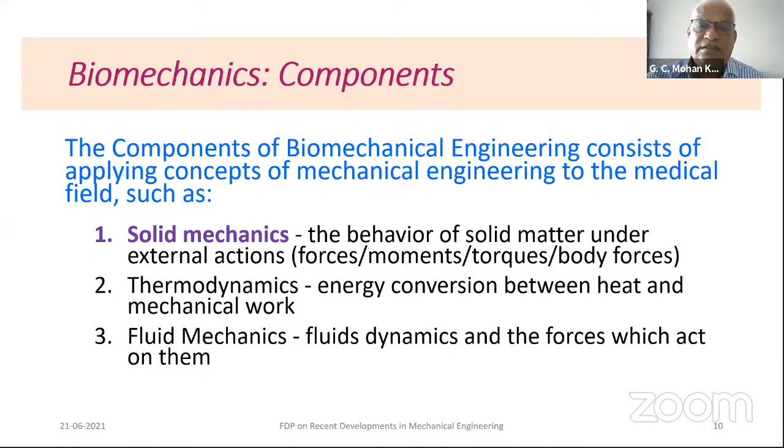Again, fluid mechanics is going to be one of the important features in biomechanics, dealing with fluid dynamics and the forces which act on them. In particular the circulation of blood, alternatives to the heart, the response of tissues to varying blood pressure, a lot of things are involved in it, and also inhaling, air, oxygen and the activity of the lungs; all that has been discussed with fluid mechanics. So it is not surprising.

One of the best examples we quote for applied mechanics in biomedical engineering comes with this figure. Oscar is a runner; he participated in the 2011 World Championships in Athletics in South Korea. He used prosthetic leg blades. Usually amputees use a kind of prosthetic, like I hope you might have heard of the Jaipur leg, fitted so that they can walk.

We have seen those people simply walk without doing exercise or such things. But to run successfully in a competition, blades have been created in such a way that they tackle all the dynamics of the body. So it is a wonderful example that we quote for biomechanics.

The role of this blade is very interesting. This blade has to mimic the action of the anatomical foot or the ankle joint. However the other leg behaves, the blade has to behave the same way. The blade has to store the energy from the body weight and then release it as the runner pushes off. It has to create some additional energy to start with. So it has to do all the activities of the muscles.

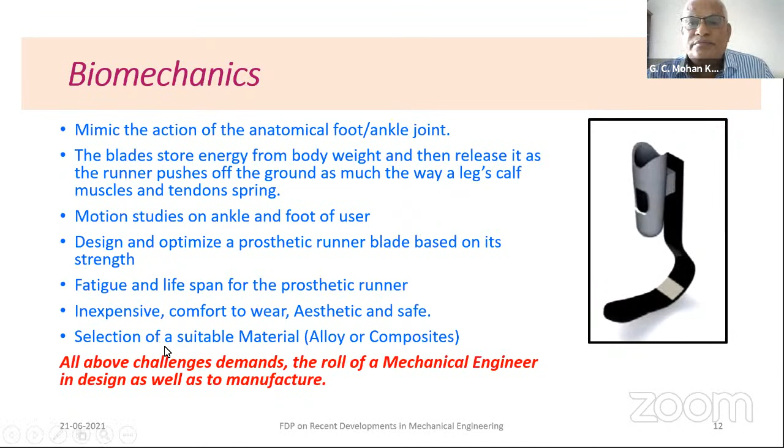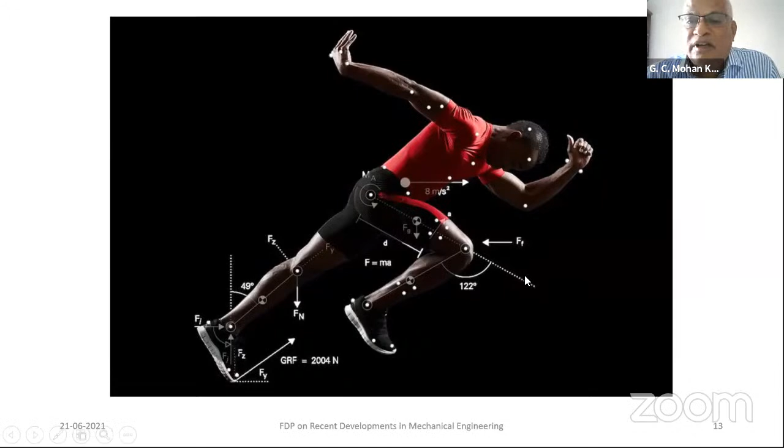A lot of things are involved in gait analysis: the relative movement of limbs, the body weight, that energy, where it is being released to the muscles, how they react, the reaction of the ground for the participants in pushing, to optimize the processes, how the force will act on each limb, what the reactions are, and how to make the best use of it. So it needs a lot of the engineering that is involved in biomechanics.

Applications of mechanical engineering, in particular to gait analysis, are increasing day by day. Take an example of a pair of shoes. Lots of shoes are available for orthopedic concerns, for sport, for others. Nowadays, sport shoes are totally different from what we generally use. The shoes are particularly designed for a particular sportsperson to best fit and to support the activities.

Therefore, gait analysis studies the complete human body activity, and all the requirements will be based on the entire body structure. So it is referred to as gait analysis. There are two aspects in general. One is clinical support, and another is scientific support. In general, we call them the clinical front and the technical front.

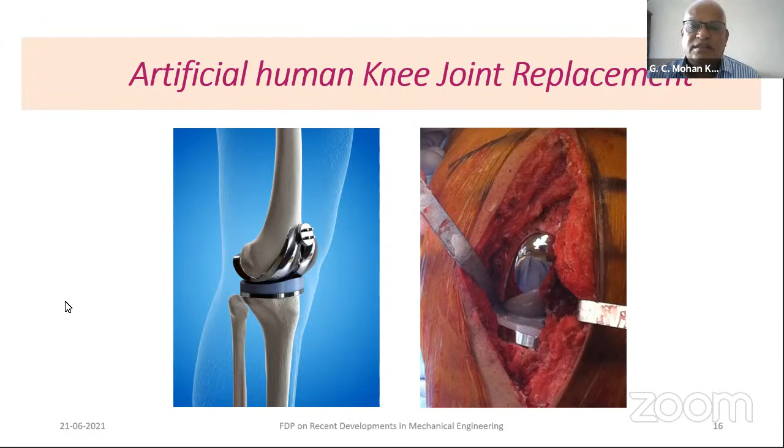Particularly to tackle the knee joints, the entire joint has been replaced. On the left side, you see what the joint looks like, while on the right side you see how it has been placed inside the body. Nowadays, knee joint replacement may be partial or a total joint replacement. Total joint replacement has become popular compared to partial. Here they cut some portion of the diseased bone, and then they fix the implant so that it can be used really comfortably. We will discuss this in detail in the coming slides.

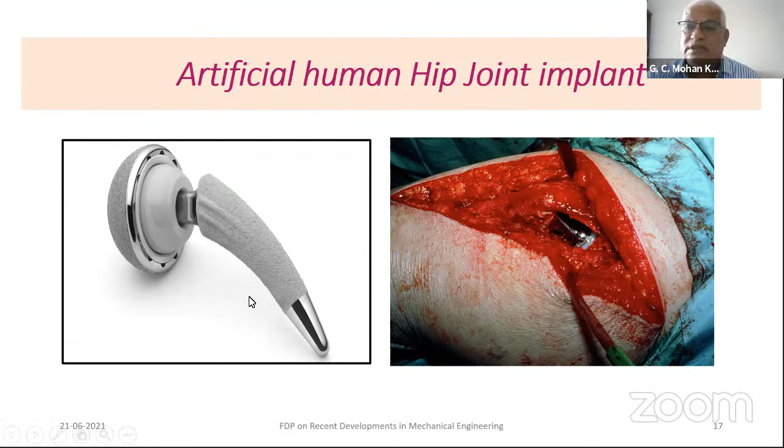In the artificial human hip joint, on the left side, you will see the implant that has been fixed into the body. It has been practiced over many years, not only the hip joint, but entire hip joints that have been replaced successfully with artificial implants and prosthetics. It has been done well.

So the development of the material, the stent's use in its life, and how to insert it, the entire process has been developed by the engineers successfully. One of the successful events in the medical field is the use of the cardiac stent.

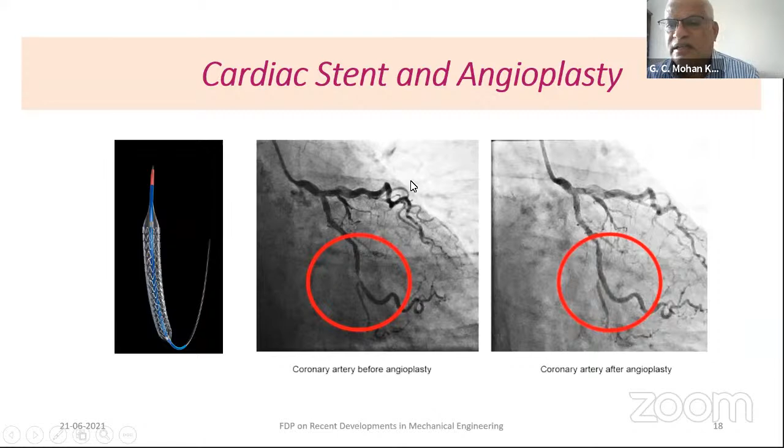So we feel that the design of such things is case to case. It means it changes from patient to patient: the structure of the leg, the size of the leg, their comfort, the requirements and the needs. Therefore, design of the prosthetic or the shoes is going to be a part of mechanical engineering.

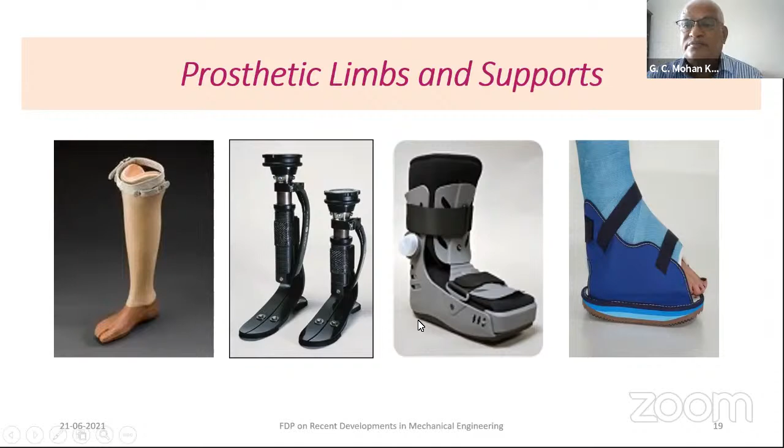It is not only related to biomedical, but also safety devices, like the design of helmets. If it is readily available, we won't feel that, but a lot of people will insist on going for a good helmet. They have to consider it should be light, comfortable, and safe enough to protect the head. A lot of technique and informative data has been involved in designing the helmet.

Also the industrial helmets, the chest guard, even the industrial glasses that have been used. A lot of activities are involved, not only in designing, but also in manufacturing.

Nowadays, the trend is to fix the dental part permanently into the mouth. They put the screws all along, four, and the denture has been fixed onto this permanently. No need of removal of the frame or any kind of discomfort to the patient. That is going to be a part of it, and it is going to be very, very interesting.

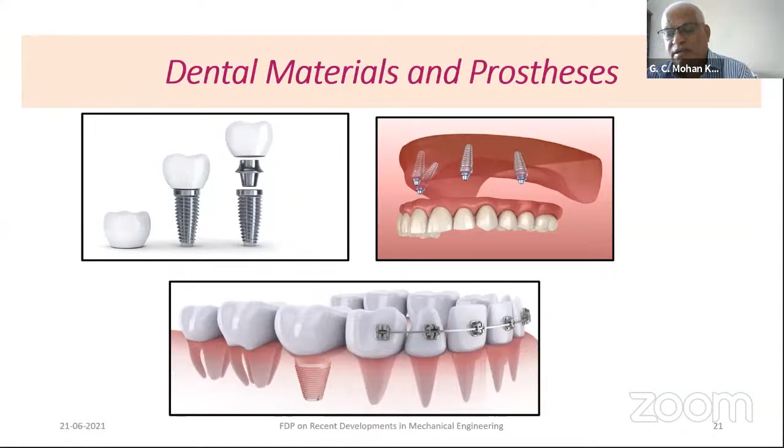The reason is all blood vessels and nerves come from the body, the jaws, into this tooth through this root. Therefore, while applying that force, you have to see that the movement of the teeth should not disturb the root of the tooth. So that is going to be so important. So it has been designed. A lot of forces have been applied to the dental wires with various mechanics.

Here it is, a lot of things are involved. If you look at the various arrangements, usually we have not seen this because it is put inside the mouth. We want to see what are the elements used to create a force on the teeth, so only the front part of it is visible here.

If you look inside the mouth, there's a small spring used to uplift and give sufficient force so that the tooth comes up using the spring. Also, you will see a wire fixed and plugged into a key, and by rotating that wire, a lot of force is generated which will draw or pull the set of teeth back. That's what I have seen.

This is going to be a different technique. Here what they do is give different rotations and a hook. Whatever extension occurs will pull it up. Also, a lot of arrangements have been made through the spring to pull the teeth set back through the arch wires, as you will see.

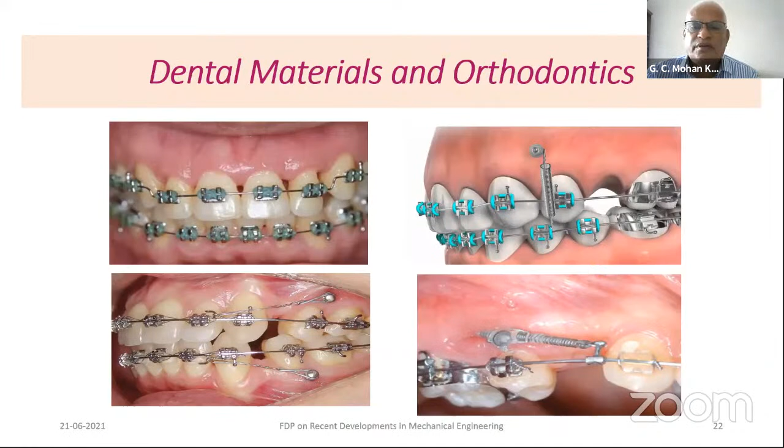A lot of arrangements and devices have been developed in the case of dentistry. There are a lot of mechanical devices available to correct the arch of the dentistry.

If you look at this arrangement, it is going to be very interesting. Looking at the outer structure, the length or distance between the two is going to be very, very small. Usually we call this the upper jaw or the maxillary portion in dentistry. To correct the tooth position, it is only possible to enlarge the palate gradually over time.

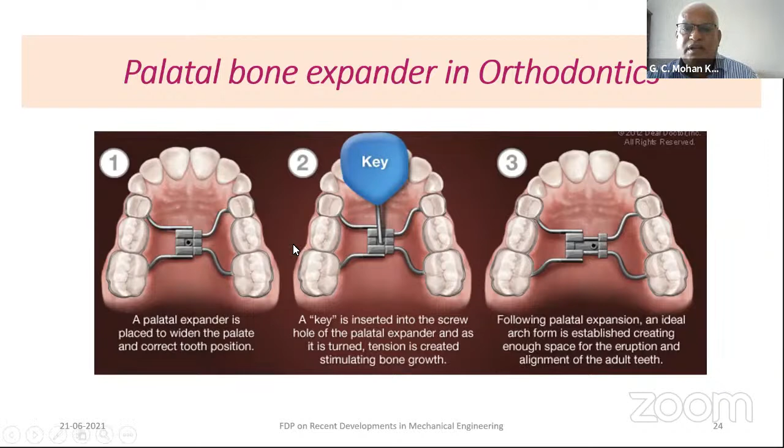The bones and structures—it is going to be interesting.

Let us go through some details about bones and structures. Bones are living tissues, we all know well, with blood vessels that carry out a lot of major activities in the body. Particularly in the case of dynamics, the role of bones is going to be very prominent and important.

The structure enables them to grow. They transform and repair themselves throughout life. Once part of a bone is worn out, you will see that it heals up and repairs itself, an automatic process that happens throughout life.

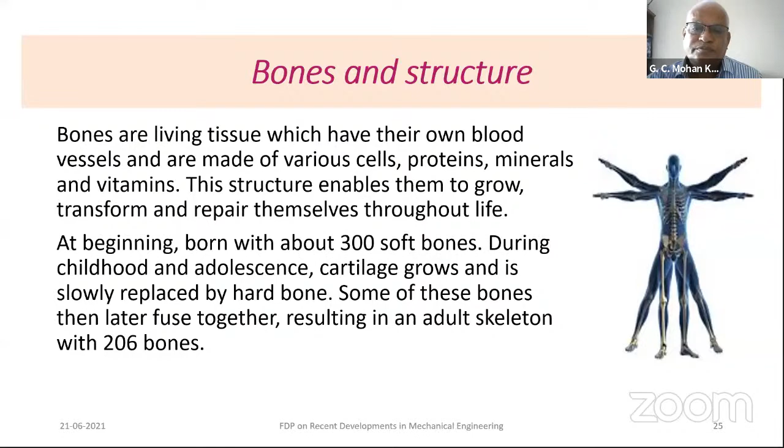There are two types of bone tissue. The first is compact bone, also known as cortical bone. If you look at the outer part of a bone, it has sufficient thickness, though most of the time cortical bone has a relatively small thickness. It is very hard and dense, and usually takes a lot of load.

The cancellous bone, or spongy bone, or trabecular bone, is the inner layer network. It is lighter and less dense than cortical bone. Where blood vessels or nerves pass through, it provides space to fill with fluid that helps a lot. This will be discussed in different chapters.

Cortical bone is very strong, and its structure has been shown here in a microscopic view. The spongy bone has much less strength compared to compact cortical bone.

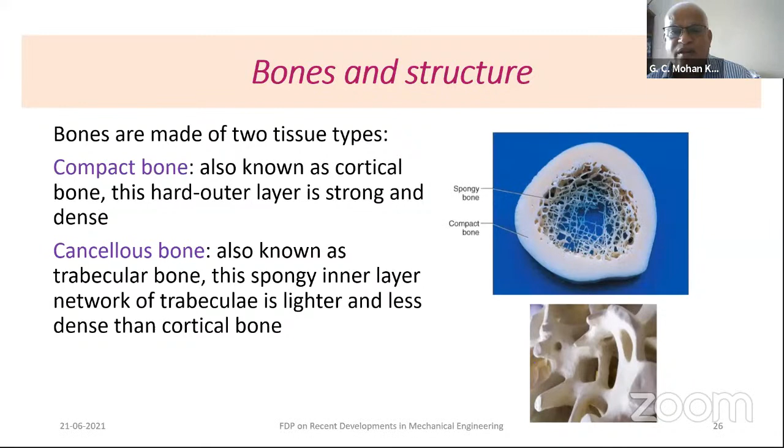Going to the inner part, it is soft, and the middle is a little hollow. Root canal treatment is inserted into the tooth through this soft part. Therefore, every tooth has a spongy, very soft tissue at its middle, which supports a lot of nerves and blood vessels in the teeth. So it is quite natural.

Now there are two types of bone structures. One is the woven bone, characterized by the haphazard organization of collagen fibers and mechanically weak. The lamellar bone is characterized by a regular parallel alignment of the collagen into sheets, as shown here, and is mechanically strong.

Most bones, long bones, whether the thigh or the leg or the hand or whatever structures we have seen, they are lamellar bone. They are very strong.

What are woven bones? Woven bones grow very fast, in areas not exposed to much load or stress. This type of woven bone can be seen when a fracture occurs.

Any bone that fractures is separated by a distance. In the beginning, bone grows in between the two fractured surfaces, and that bone grows in the absence of any day-to-day activity forces on it. Therefore, a soft bone grows between the two fractured bones, it is very soft and not ordered. When it is being exposed to stress, the fibers arrange themselves and it becomes part of the bone.

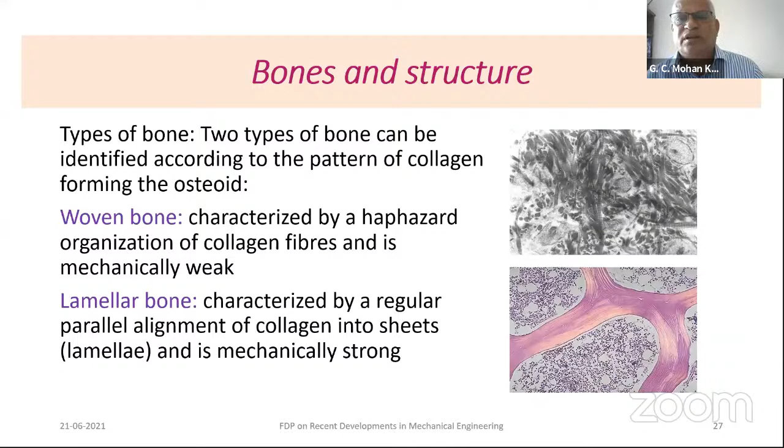As a mechanical part of this, we usually talk about the Young's modulus and strength of bone and other materials, to understand and compare their strengths.

Ultimate strength of the bone reveals how much load it can bear. Strength is a capacity of the bone, and for cortical bone you will see that compression strength is higher than tension. This is because most bones are always subjected to compression, and very rarely are bones subjected to tension.

Some part of this we see in dental contexts, when forces act like a beam. Some part of the beam will be either below or above, depending on the location of the force, and will be subjected to tension. So if you look at the values, compression is more than tension, and compared to shear, it is going to be very small.

So whatever values are given, it is for a dry bone. Generally dry bone values are set and accepted to be very close to living bone, since it is difficult to conduct experiments on living bone. Therefore experiments on dry bones are more valid and agreeable.

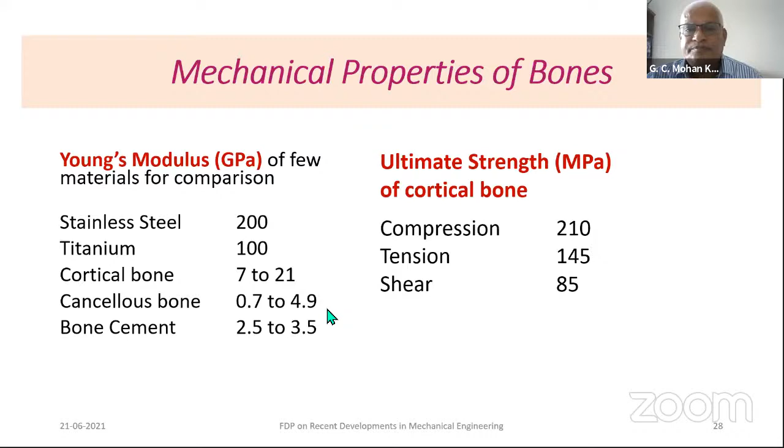So when the bones have healed up, it is necessary to take out such wires or implants from the body. Usually medical practitioners will decide when it has to be taken out. So to understand the behavior of bones, usually we do a tensile test. It is more appropriate to understand the strength of it.

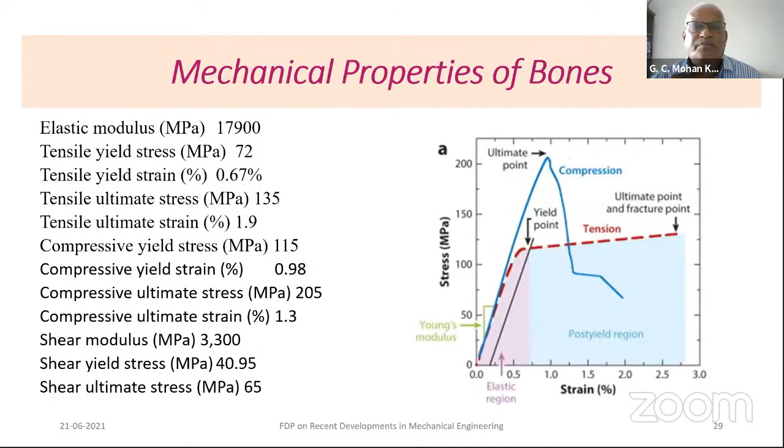So I'm giving a lot of information about when the load has been applied along the axis, or the transverse direction perpendicular to this, or even the shear, because while modeling with the finite element, you may need a lot of data, the directional stress data that has been recorded. It is going to be very helpful in the finite element analysis.

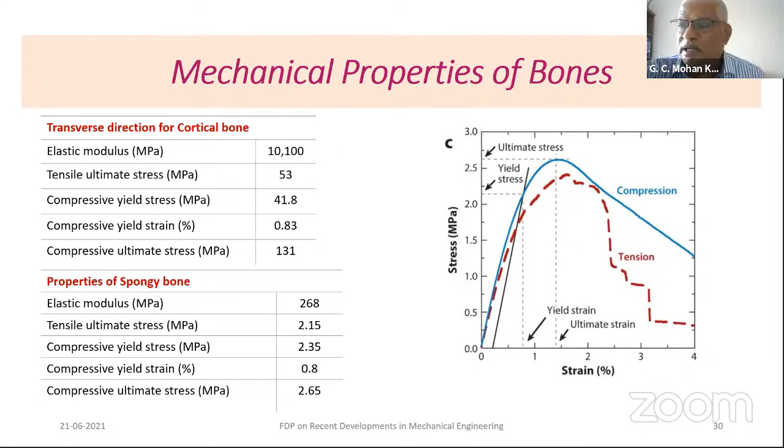Various types of joints have been seen in our body. There are three types of joints that we usually classify. One is immovable or fixed joints, fibrous joints, found in the cranium. In the cranium, meaning in the head, there are a lot of sutures, but they will not move. It is a joint, we call it sutures, right? So they will not move.

In the case of the pelvis and the backbone, it has been fixed, but it will not move. The pelvis and the backbone have been fixed via fibrous material, but there will not be any movement. So it is totally a kind of bone.

And the slightly movable joint. It means very, very small movement, so that the rotation is not more than around 12 degrees on either side. Vertebrae, or the backbone, will not rotate fully. Only part of them will rotate. And there are freely movable joints. They are called synovial, in the presence of synovial liquids. When the movement is sometimes more than 40 to 60 degrees, it is referred to as a movable joint.

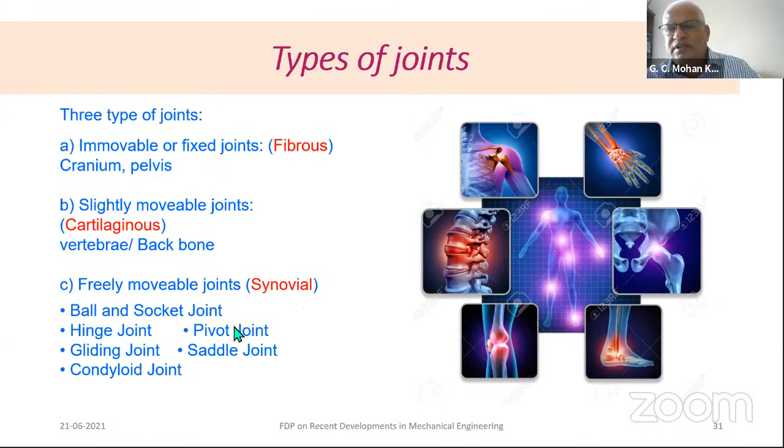And freely movable synovial joints refer to the knee joint or the ankle joint, right? And the hip joint, these all come under this type of joint. How are the joints made? There are three types of connective tissues used within the joint for a successful, constrained joint.

Cartilages are very common. They form a kind of cushion between the bones in order to stop them rubbing. Usually cartilage looks like a white spongy thing at the end of the bone. So this is one bone, right, in the upper part. And here you will see that thick layer, a soft material, referred to as the cartilage. And another similar cartilage for the other bone is fixed here. Cartilages are found at the ends of bone. They give you a kind of cushion when they come in contact.

Okay, that's fine. The ligaments are very strong strings that hold the bones together. The upper bone and the lower bone, you will see the ligaments crossed like this. They connect from here to here in the middle. If you look at the cross section, ligaments are like threads or strings that hold the joint. So usually a lot of force is taken by these strings to keep the joint intact. Even when you apply a moment, it rotates and deforms, and the ligaments expand and hold the joint intact.

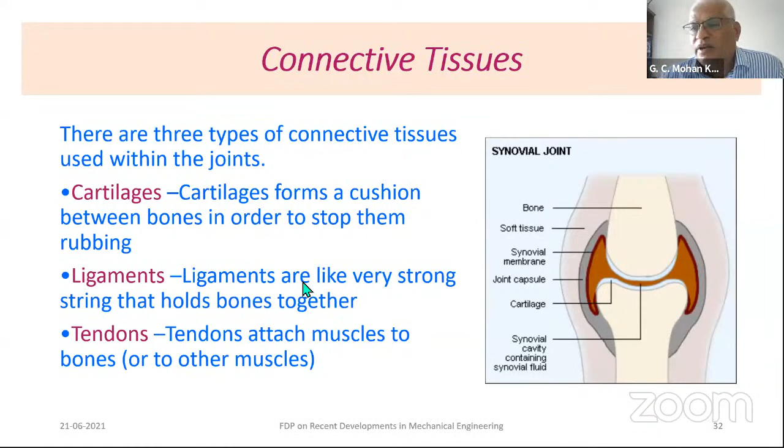In our study, we have done a lot of work on development of cartilage tissues. A couple of my research scholars have successfully developed a material that can replace the damaged living cartilage with a new fresh composite. Recently, two research works have been going on and have been published. I will take a few slides from this.

The first paper has been published in Nature Scientific Reports, that is, nano hydroxyapatite reinforced chitosan composite hydrogels with tunable mechanical and biological properties for cartilage regeneration. And similar basic work has been published in Materials Research Express and also in the conference proceedings of the American Institute of Physics.

He was the first research scholar working on some of the biomaterial tissues or ceramics that can be used for joint purposes. Now, in this paper, if you look at the title, the composite has tunable mechanical and biological properties. It means the mechanical properties of the composite will vary according to the requirement instantaneously. More interestingly, the values of the mechanical properties can be changed, and the biological properties also change accordingly. It matches well with cartilage regeneration.

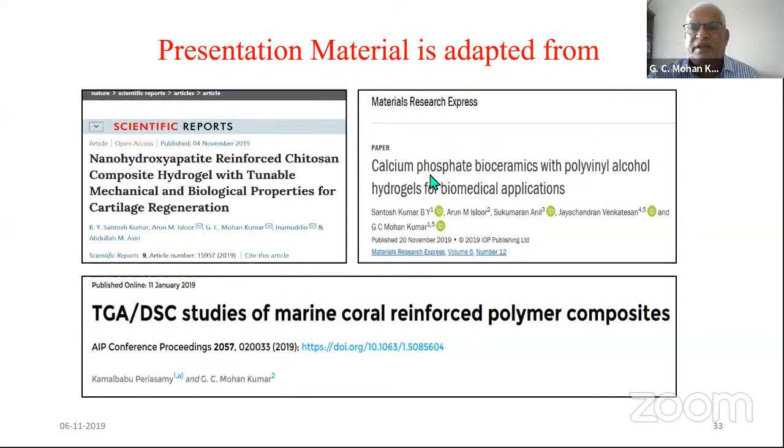And what is also very interesting is the regeneration: when the composite fails into a number of pieces, it will reunite itself. It means the composite will grow itself to reunite and it works continuously. So that's the kind of work that has been taken up. I will take a few slides on how the things have been done.

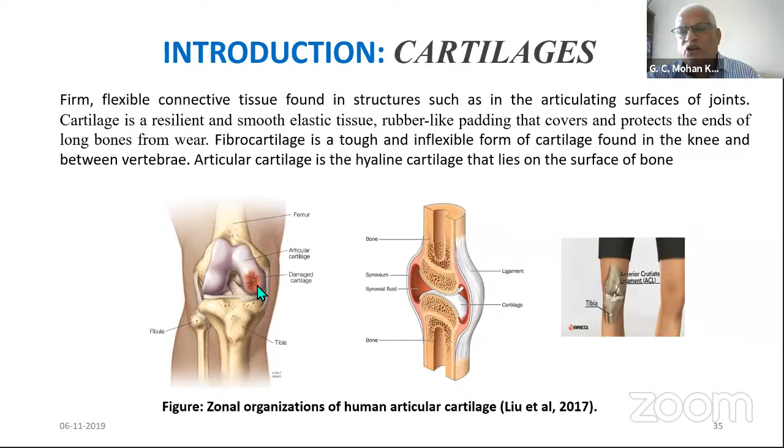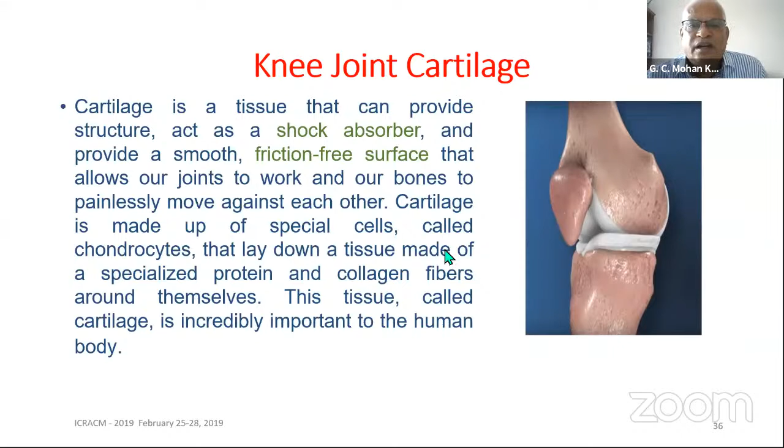This picture will give you a clear picture of how the cartilage looks in the joint. It works like a shock absorber, and it is also a friction-free surface, supported by synovial fluid in between the two parts.

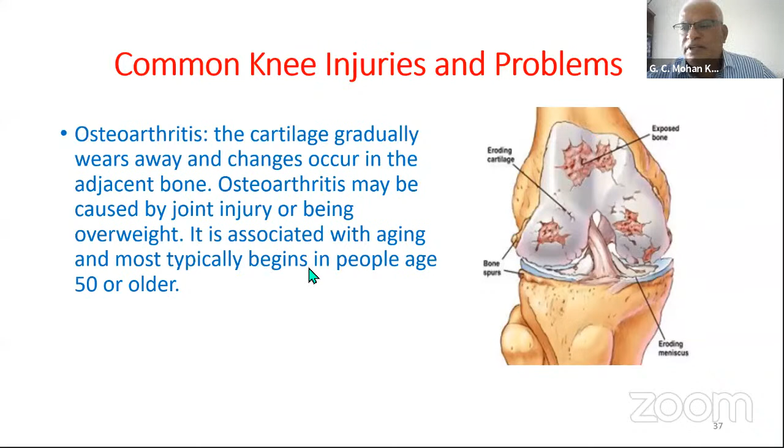So there could be damage on the cartilages. It may be because of the injury or osteoarthritis. A lot of issues will cause it, but this type of disease is going to be very common for people of 50 years or above. There are a lot of treatments also available.

The rough cartilage will be trimmed and ground so that it softens. Or sometimes what they do is insert what you call pins inside of that. They put small holes and it will refill. People do that also. So that is going to be the structure, how the surface looks, and it will show that.

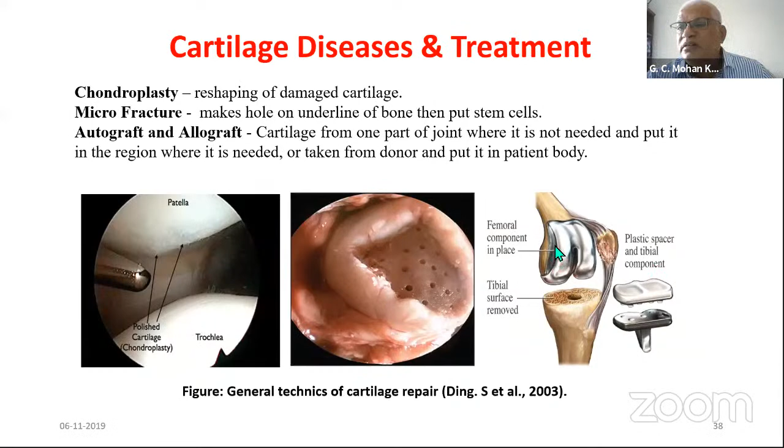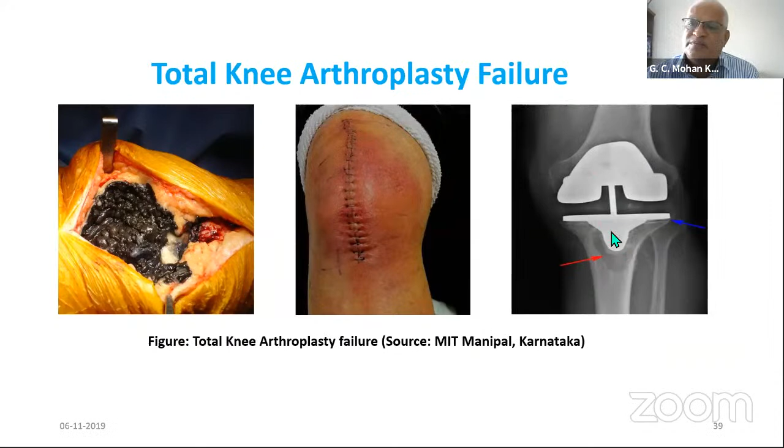Suppose you want to replace the cartilage, what will be the alternative in that case? That is discussed later. So when the surgery fails, you will see how it happens. The entire joint will become reddish and swollen once it has been opened. It looks like this, so this is the artificial knee joint that has been put in. That will be the picture of this.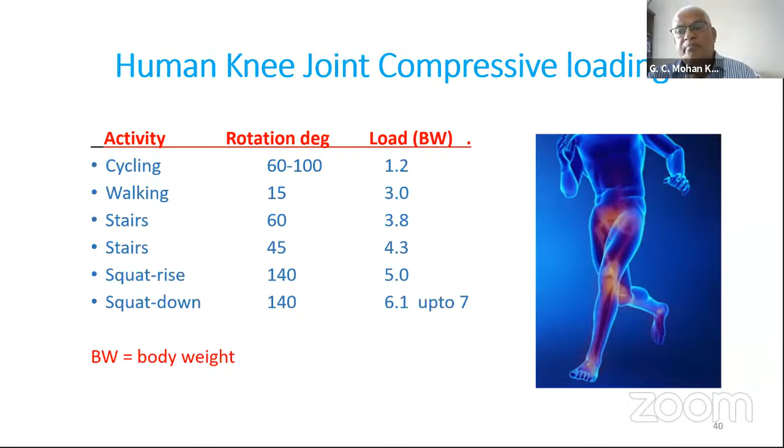It's also interesting to see that while walking, when one leg leaves the ground, the entire body stands on one leg, right? The whole body weight comes through the joint, and the body weight acts at the CG, so there will also be bending. Therefore, not only a compressive load, but also a heavy bending load comes to the joint.

What are the substitute materials for the cartilage? In one of the theses, submitted by Kamal Babu, a lot of work was done on cartilage materials, and he developed polyvinyl alcohol hydrogels, a promising material reinforced with a bioceramic, hydroxyapatite. This ceramic was developed by processing cuttlefish bone. This material was used in the PVA hydrogel to prepare composites, and a lot of experiments reveal that it is going to be more useful.

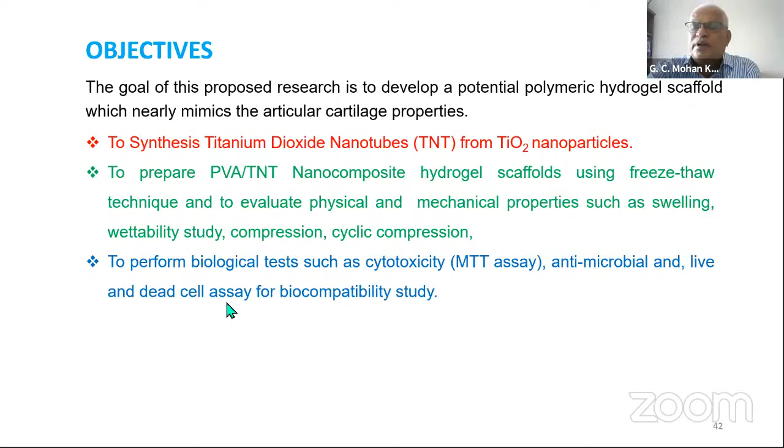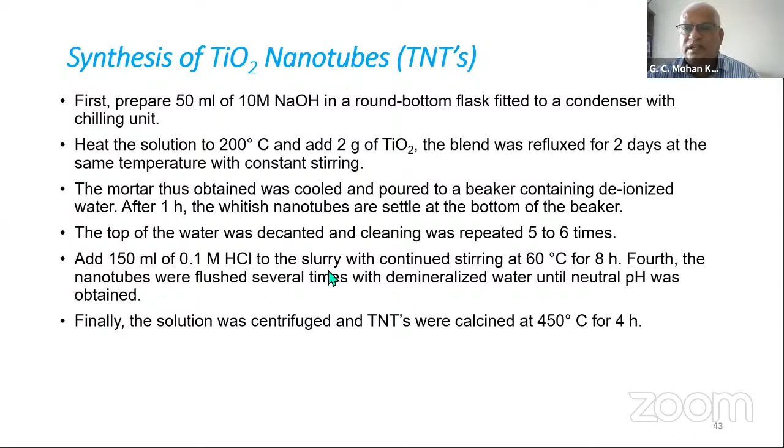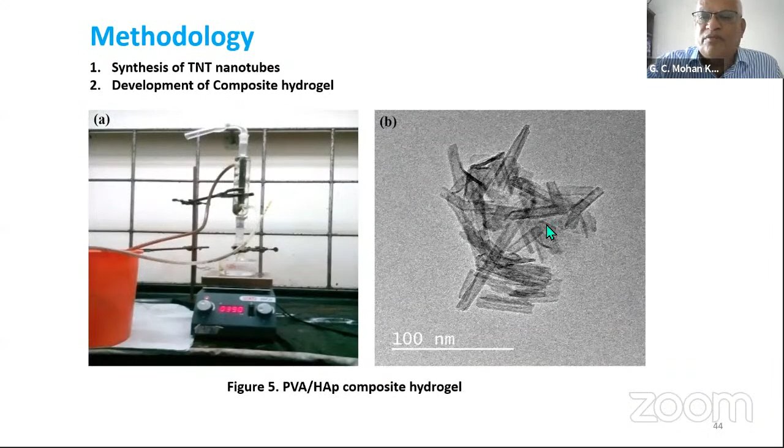The objective of that work is to synthesize TNTs from titanium oxide nanoparticles. A lot of additives have been added to prepare the composite. In brief, these are all the articles published in Nature journals; you can go through them. How to synthesize titanium oxide nanotubes for developing composites can be seen here, with the different structures addressed, and how nano-reinforced materials have been developed.

Now, this is a piece of that hydrogel. It looks very transparent, and when you hold it in your fingers and press it, you will see that it compresses to a great extent. It won't rupture, it won't break. Even a 10 mm thick cylinder can be compressed to 1 millimeter or even less. So it is such a spongy material. If you look at the structure on the right side, you see how the different combinations of reinforcement and hydroxyapatite behave.

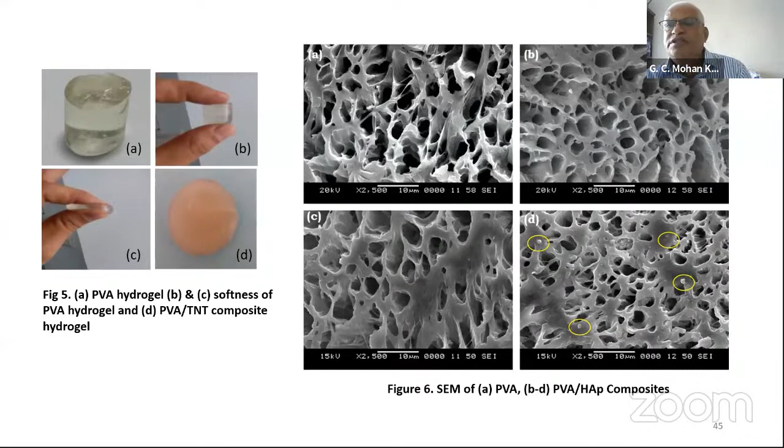And if you look at the formation of the material, how spongy it is, that has been captured in these pictures. Okay, it is cartilage. I will not go into the detail. A lot of polymers are available for the reinforcement, and among these we have taken up this hydrogel and the PVA, and for the reinforcement hydroxyapatite has been taken, which is referred to as a bioceramic.

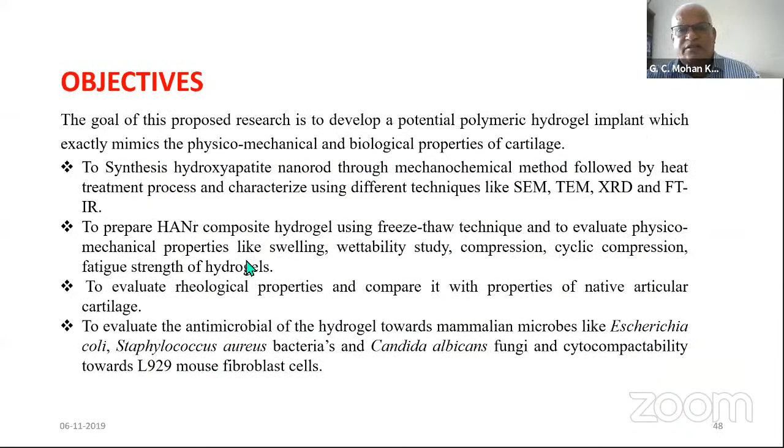So the objective of the project is to develop a material which can be used as a substitute for the cartilage material. So you will see how that material looks. The hydroxyapatite reinforcement has been derived from fish bone; it has been crushed and calcinated at 800 degrees centigrade for more than 6 hours, and the material that has been processed chemically has been used as a reinforcement.

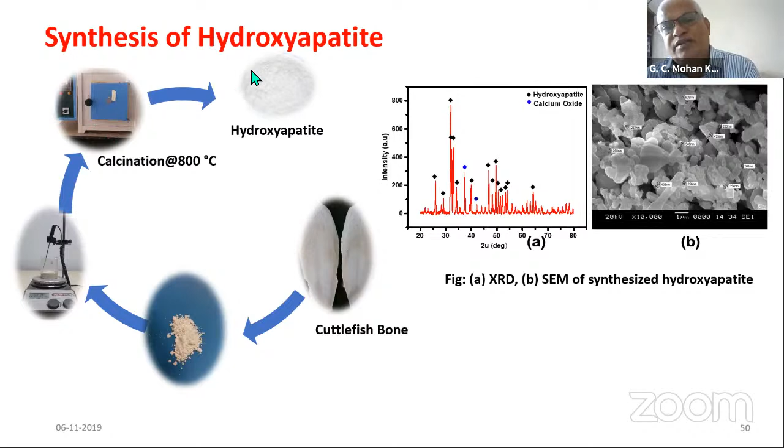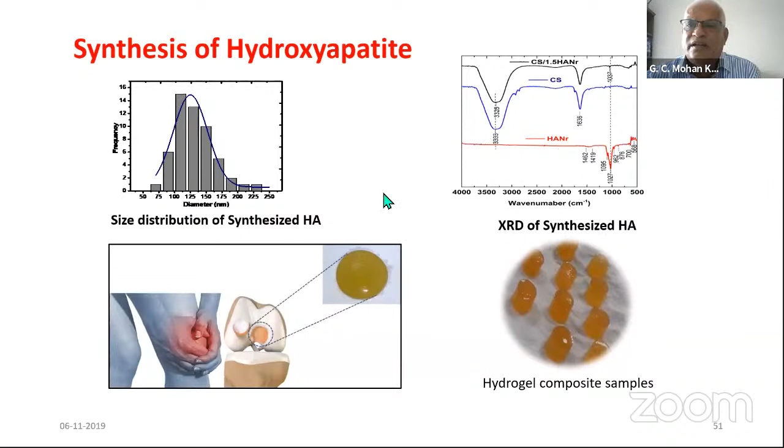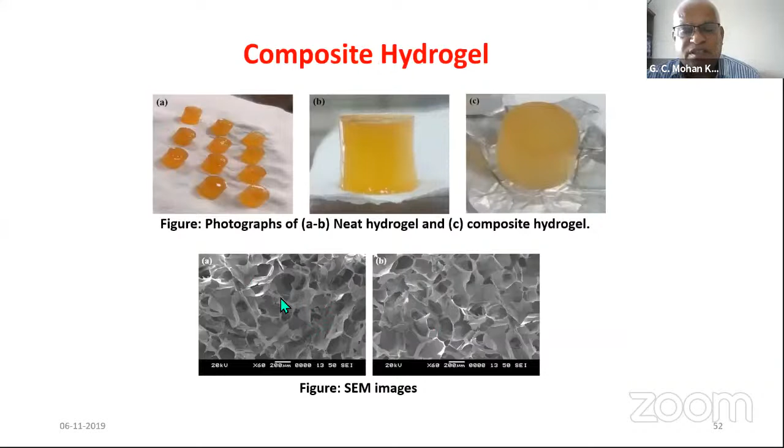You will see that a lot of hypotheses have been tested with the technical support of XRDs, TEMs, all done systematically. Among all the materials developed, this is the best composite hydrogel, with better structures compared to the previous one.

Okay, what is the swelling and the wettability of the composite? Because cartilages are particularly made to absorb liquid from the surroundings, the swelling ratio, how much it absorbs, should be more than 400%. It means if you take 100 milligrams, it has to take 4 times of that liquid. It has to absorb so much liquid.

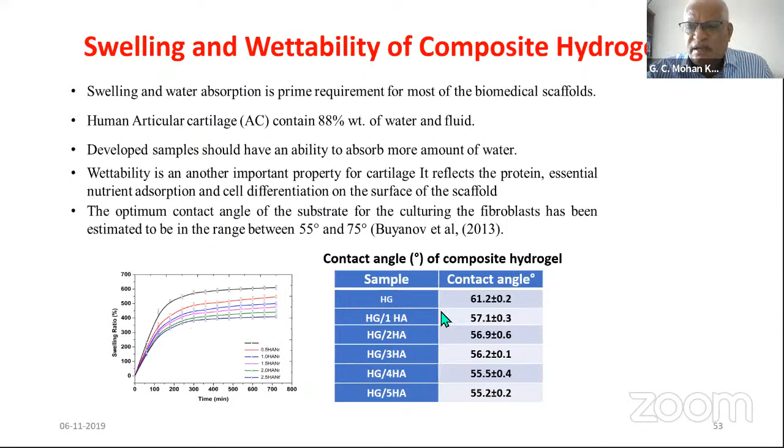So these experiments reveal that the HAP with the higher percentage will absorb a higher percentage; it can even reach up to 6 times, that is 600% water that it can absorb. So these are the different properties. From the mechanical engineering point of view, how this hydrogel behaves with different proportions of reinforcement is taken here to determine the strength. Here the maximum strength is around 1.2 megapascal.

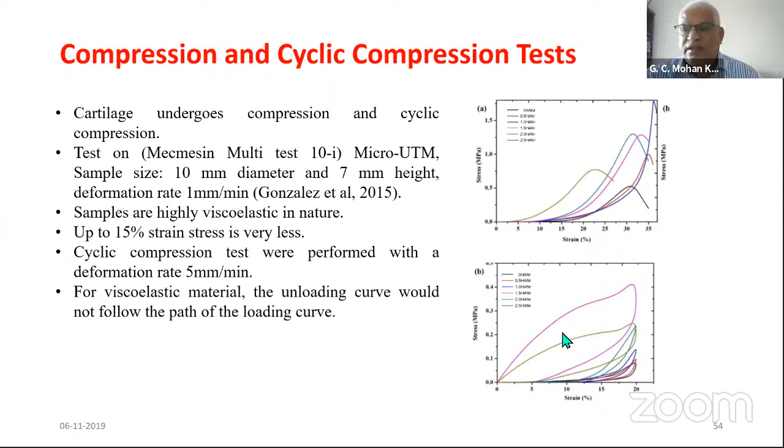But most cartilages are subjected to cyclic loading. It means while you're walking or sitting and all the activities, load is applied and then relaxed. It is a kind of fatigue. Therefore, how the material behaves in fatigue matters, because it is a highly viscoelastic material, so you cannot expect the loading and unloading pattern to be similar. It behaves in a different way. The second graph shows, when the load is cyclic, how it is deformed.

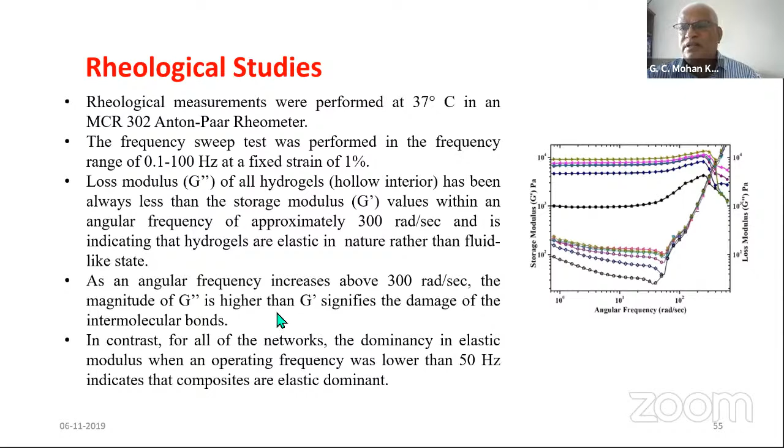Okay, then coming to the rheological studies, the viscoelastic properties have been taken out. And if you take the friction test, it is very amazing. Natural cartilage has a coefficient of friction that is so small that we do not have any equipment to measure it. So it is only assessed by the other method of rubbing the material against another cartilage material at higher speed and looking at how much friction has been developed.

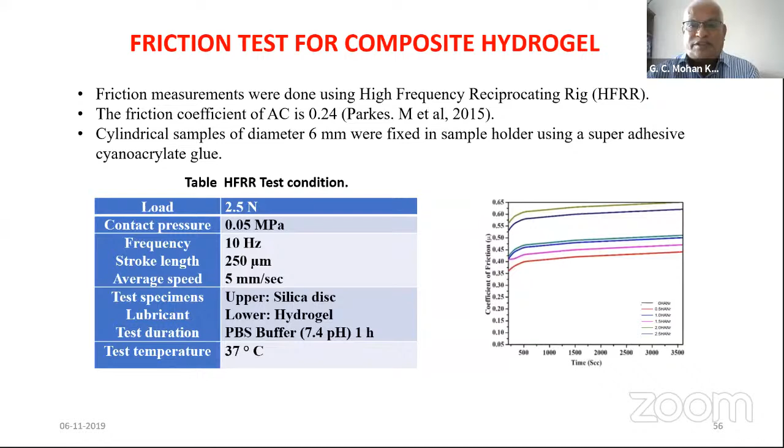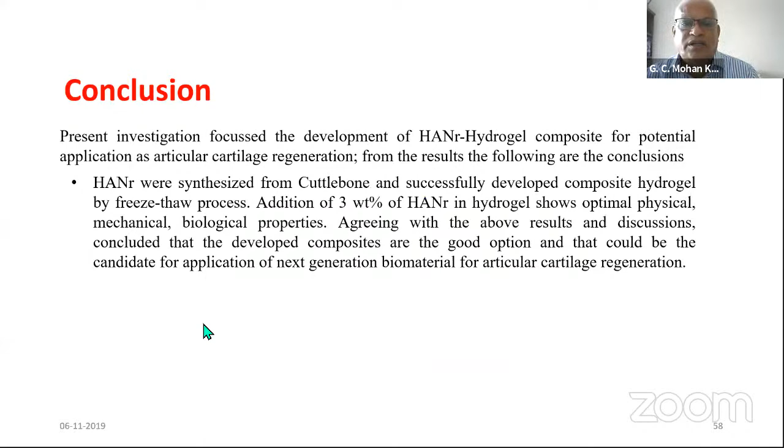The other work, I hope if time permits. Okay, I have 1 minute left.

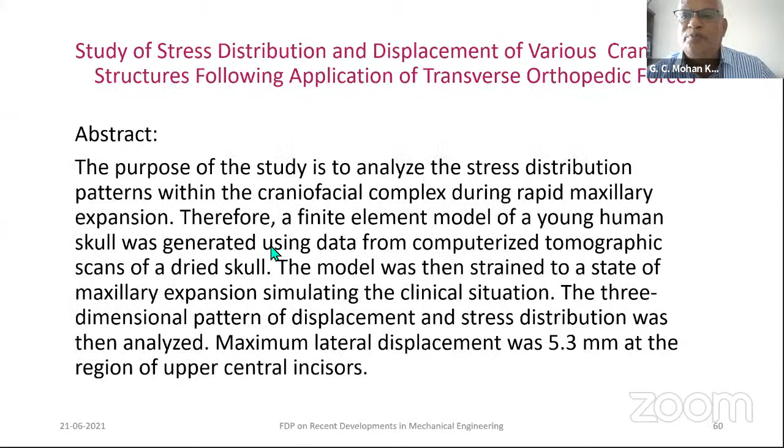So anyway, just at a glance, one of the good works was done long back. It is published in Angle Orthodontist. The work was done at Bapuji Dental College at Davangere, when I was working at BIT Davangere. Now this is to understand exactly what it is. I showed you this slide long back in the case of the palatal expander. It is a very slow process. In the case of rapid maxillary expansion, right?

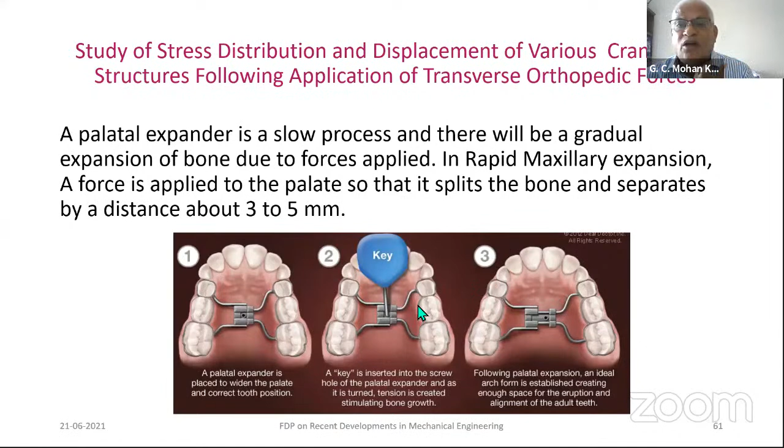In rapid maxillary expansion, it is widened in such a way that it creates a complete fracture of the palate. It splits into two and widens about 5 millimeters. At the middle of the palate, it separates this bone into two by applying that force, around 5 millimeters. What happens to the structure? What happens to the skull? What is the net effect? That has been studied.

The inferior parts of the pterygoid plates were markedly displaced laterally. These are all medical terms that have been used. When the plates are moved by 5 millimeters, there will be a vertical displacement, and the palate level will come down, badly affecting the anterior border of the nasal septum.

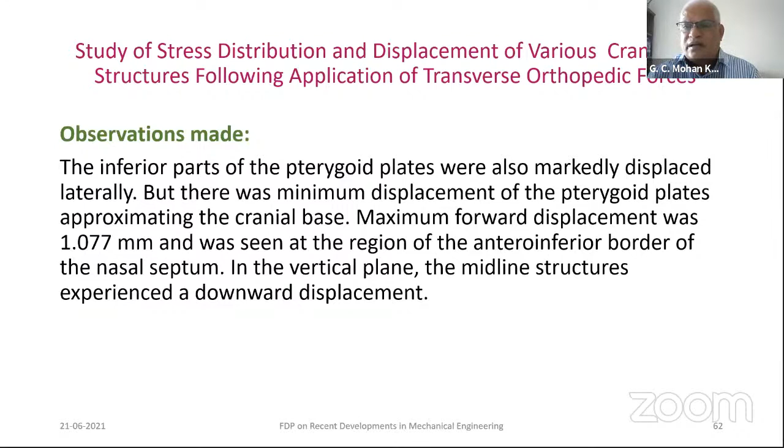In the vertical plane, there will be a lot of difference in the osteostructure, the bone structure. It means applying enormous force on the palate and mouth affects other parts of the head also. That is the purpose of this study.

A CT scan of a dried skull bone was taken, and at various points radio opaque materials were pasted to trace the location of each slice. A lot of points were marked so that even on an X-ray, these particles serve as reference points.

Different slices were taken through the entire skull, tracing the boundary of the bone and its thickness. Lines were traced completely from one point to another, both outer and inner, so that a three-dimensional finite element body was created using the CT scan.

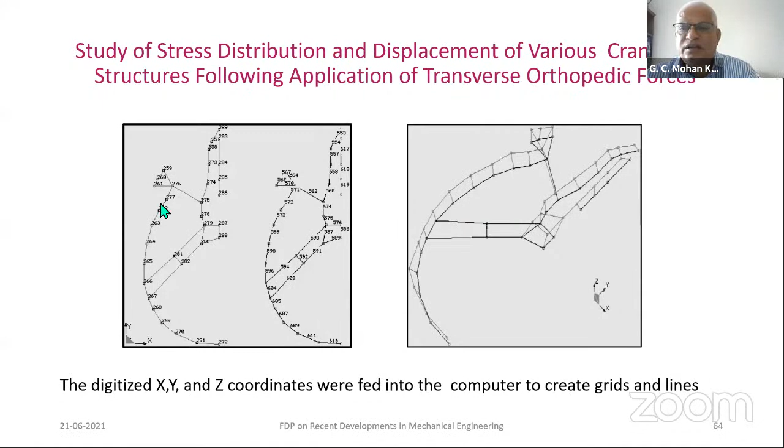So this is a three-dimensional model of the skull. This work was done approximately 15 to 16 years back, when the computer capacity and finite element packages were quite limited. In spite of that, the work was done, and around 16 lakh nodes were worked out to develop the structure.

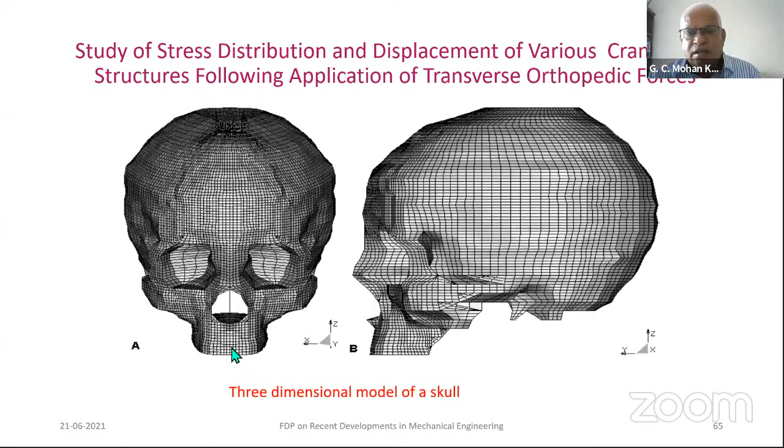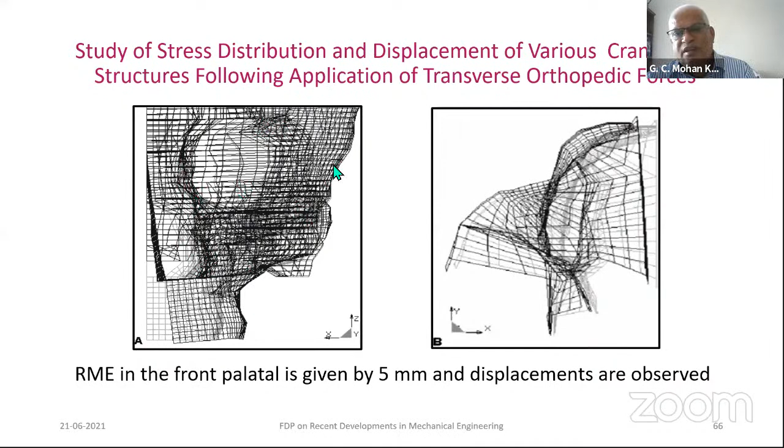If you observe the mid plane, here is the palate. The details of the palate have also been built up, and this bone is separated by 5 millimeters. When it is displaced by about 5 millimeters, what happens to the eyeball locations, the ear, and the zygomatic arch? That has been observed in this study.

So this is the finite element result, the final result I am showing. The maximum stress, interestingly, is going to be 57. Where the separation happens on the palate, it suffers a lot of stress, and you will see that a lot of regions, even in the area of the sinuses as well as above, and even well below behind the ear, also get affected.

So overall, you will see that nearly 50% of the head has been affected by the surgical procedure. So it is going to be very effective.

The results reveal that the stress concentration points observed on the skull match well with the complaints of patients who have severe pain. The pain is not exactly where the surgery was done, but is observed at other places than the surgery site. Therefore, the patient complaints and the finite element work match well.

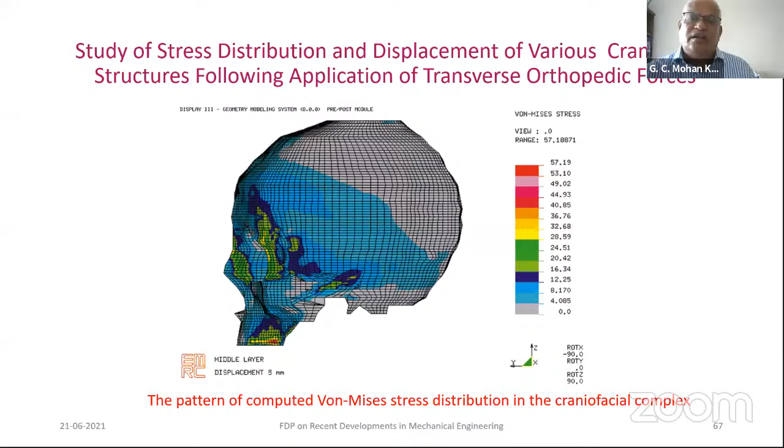A lot of data has been taken out regarding the von Mises stresses in different parts. Looking at the location where the surgery was done, maximum stress is observed there, but also at the zygomatic and frontal regions, even though far from the surgical site, the stresses are also much higher.

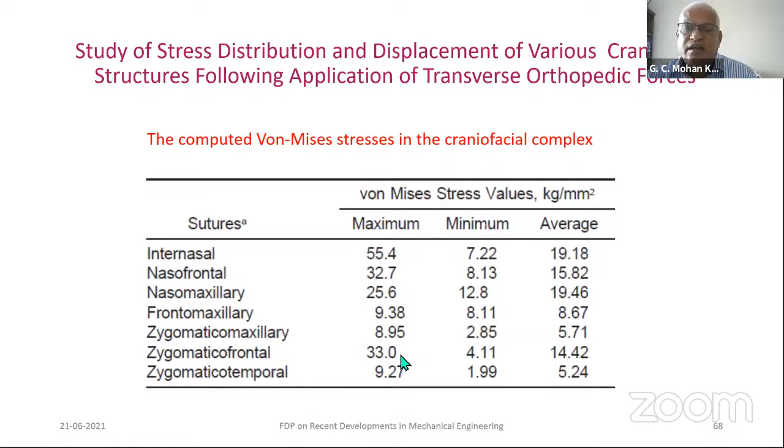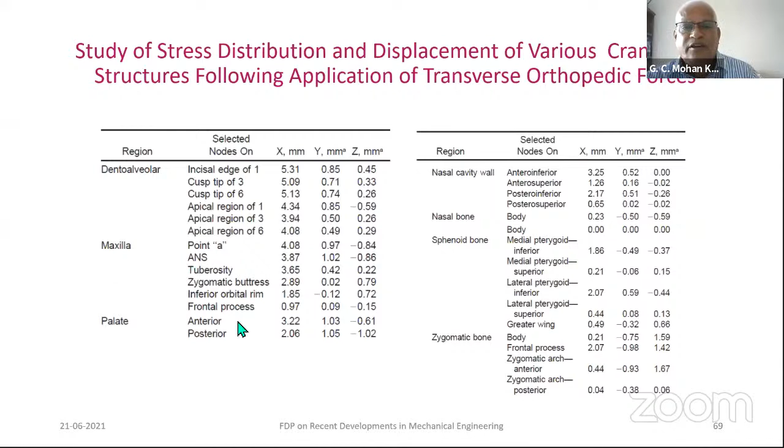This indicates that the displacement causes a lot of movement, and the sutures result in stress concentration. That is why the patient feels a lot of stress and pain other than at the surgery site. So what this entire paper reveals is going to be very interesting.

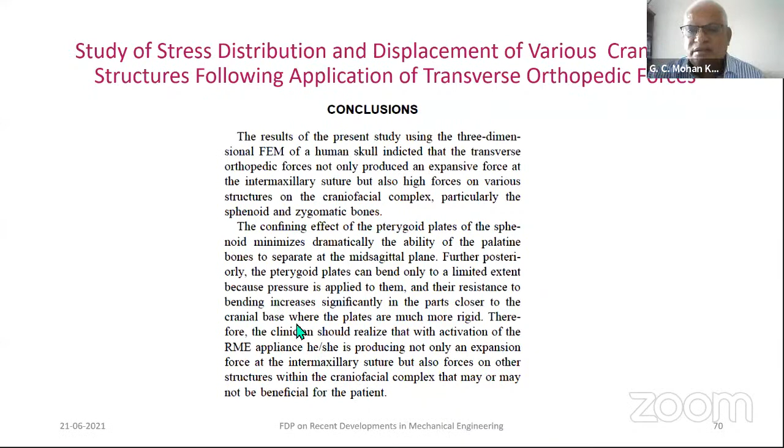As a conclusion, it has been drawn from the results of the present study using three-dimensional FEM skull that transverse orthopedic forces not only produce expansive force at intermaxillary sutures, but the entire maxillary sutures will get affected, along with high forces and structures on the craniofacial complex, particularly the sphenoid and zygomatic region just above that level, which was also affected. So that was the total conclusion of this study.

I hope I haven't taken too much extra time with this last case example. A lot of work is going on developing materials for cartilage and analyzing this. So from this, the role of a mechanical engineer in biomedical is going to be very important - not only in developing processes or implants, but also substitutive materials for human beings to tackle trauma or accidental cases.